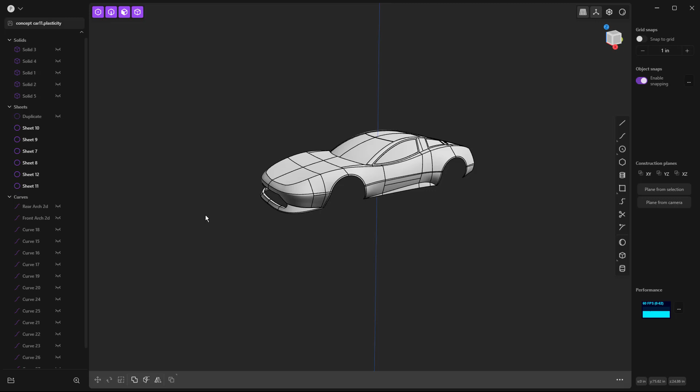As I've mentioned in all the videos, we're going through this process in real time, so anything we run into along the way is something you'll likely run into too. We're troubleshooting, problem solving, and now we're at the point where we want to finish off the back end and decide how much detail to put into this thing.

As I mentioned, these scoops that we did, I'm not really loving those shapes. Probably need to spend a little more time there, but I think the back end really needs to be finished first.

So we're going to get started by getting rid of the mirrored versions, and we're going to work from the midline. Now the car currently has a completely flat back end, and that's something we have to change. It's going to slightly affect the little spoiler we created, which is fine because it's just a general shape.

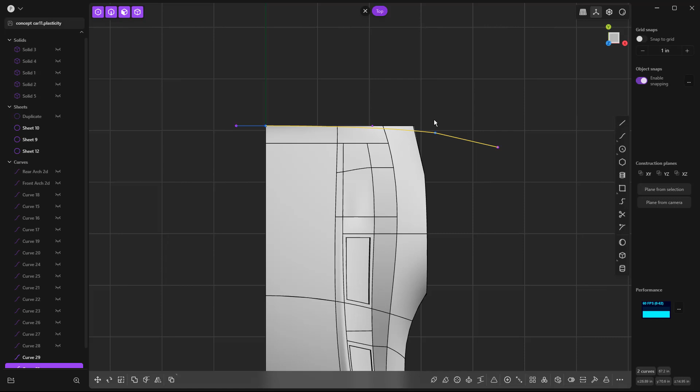So what I want to do is start by adding a reference line here, and another reference line out here, then bridge a curve between them. A lot of times I'll use these sacrificial lines, G0 at the end, G1 at the start, and then I can use that to cut the body with C. So then I can get rid of this little piece and the curves I don't need.

So we gave it a little bit of curvature in that direction. And from the side, it's straight up and down, and I really want it to maybe roll under a bit more. We've got this section here, so what I'm going to do is just start with a vertical line and bring it back to about where I want, then rebuild.

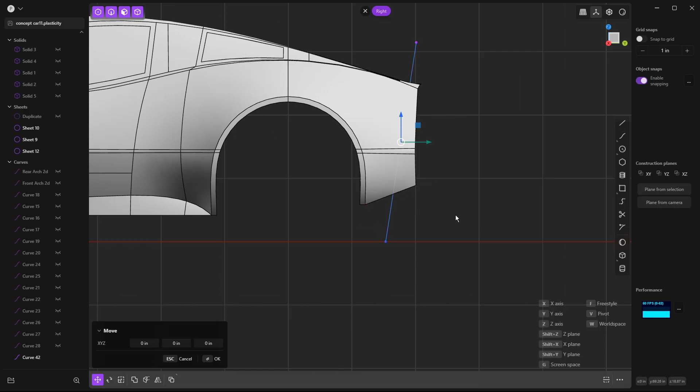This side view isn't as critical as, say, viewing it from the top across the mirror line, but I do want to make sure I'm still kind of close to the spoiler. So maybe go there. If you have trouble seeing it, you can always turn off show faces, and let's play around with this a little bit.

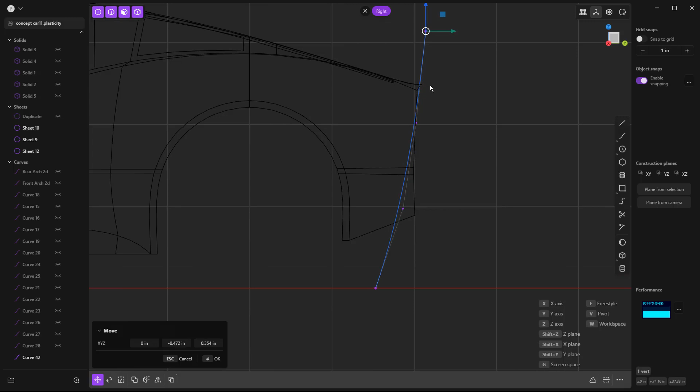We do have to be careful here because of the curvature we just added, so just keep in mind we have some limitations. I'm just going to see what this looks like, bring this over, bring back our faces, and use this to cut the body and see what it looks like.

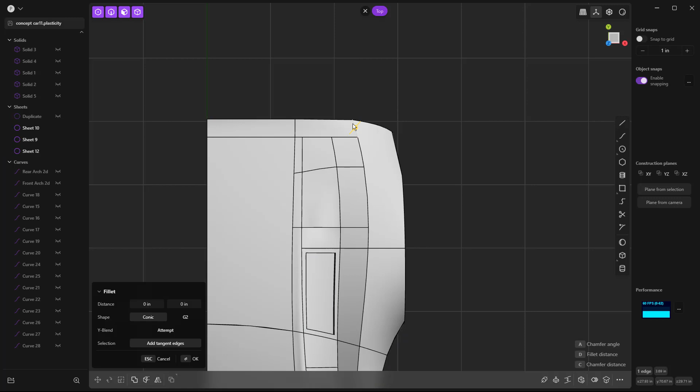All right, so pretty short back end from the top. It kind of makes a little bit of a jump at this edge, but remember, we don't have tangency here—we've still got a sharp edge. So I am okay with that, not too worried about that jump in transition. I think we're good to go on that.

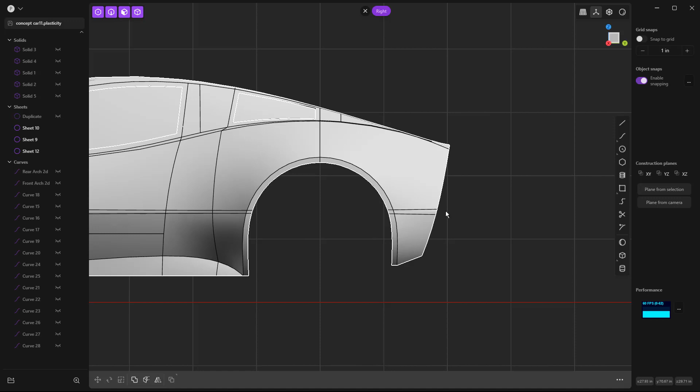Another thing to consider is that on the front end, we carry that mid-body line into the front bumper. Now on the back end it's pretty low. I'm not necessarily sure we want to carry it over, but generally when you have a hard body line like that, whether it goes up or stays there, it's still used as an inflection point for other curvature or changes in shape. So we'll just have to play around with it and see what it looks like.

The first thing I'm going to do is actually fill in the entire back end, and then we're going to cut away sections of it that we might not want—maybe we'll add things like an air splitter or an air dam or something like that.

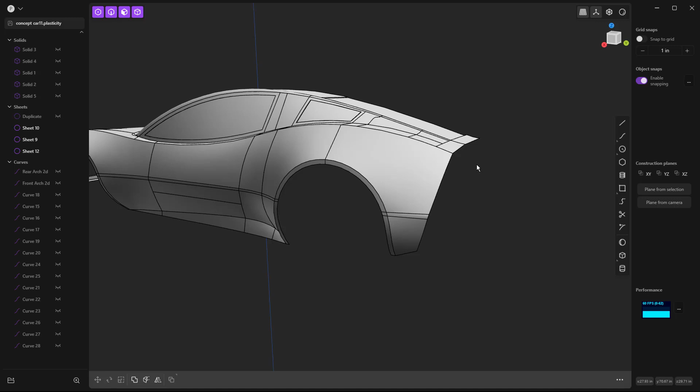So let's just get started by going to a side view, taking a look, and probably just adding a curve here. From a side view, I'm going to bring it in roughly the same direction, rebuild it, and kind of bulge it out. We do want to make sure the bottom is at the right location, so I need to move that up.

And then maybe move that one up as well. And this one.

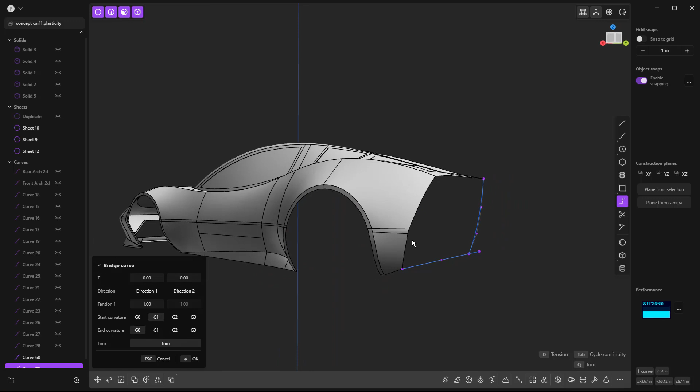Now from there, I'm going to add a line in the Y direction and then use this as a bridge curve. At the midline, we always want to make sure we're maintaining tangency. At the rest of the body, G0 is going to be fine unless we want to carry tangency out for a lower section that's maybe a bit wider, more like a true bumper. But for a concept car like this, it doesn't really fit.

So we're just going to go with just a basic tangent line. We're going to extrude this as a tangency reference and then try to fill this in. I am going to try my hand at loft, which probably isn't going to work, but I'm going to loft from that first curve to these curves, G0 here, and then we're going to shift, select guides, those will be G0, shift select this one, and then just take a look.

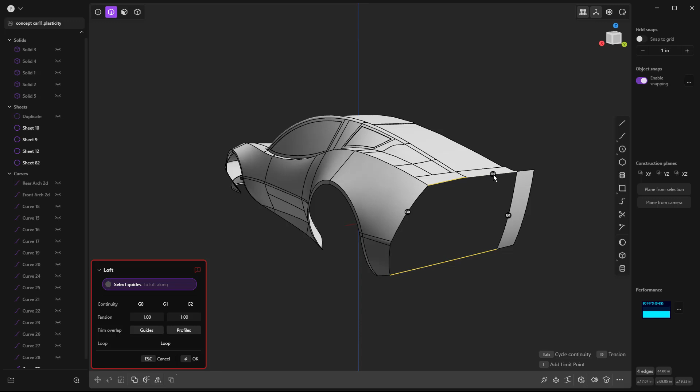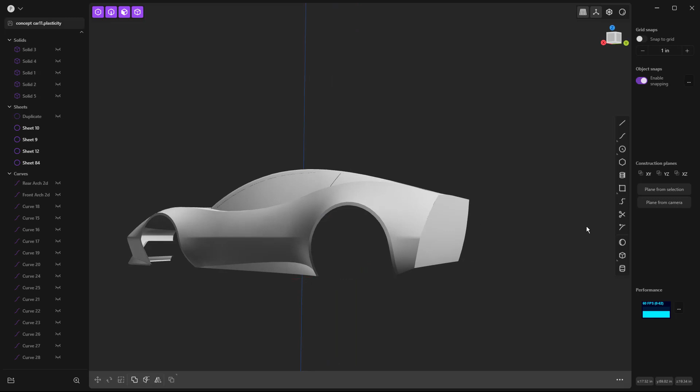Let's get rid of those for now, and let's take a basic look. So if I hide the edges, we've got that hard transition on the back. Now that's a lot of body. Definitely not what we want, but again, it's just a starting point. So with that, I think that looks pretty good.

The next thing that we want to do is figure out where we actually want to break it up. So using Alt and the mouse wheel, I'm going to get to sort of this back view. I am going to duplicate these curves, and I'm actually going to hide the rest of the body. I don't really need to see it, and I don't want to cut it.

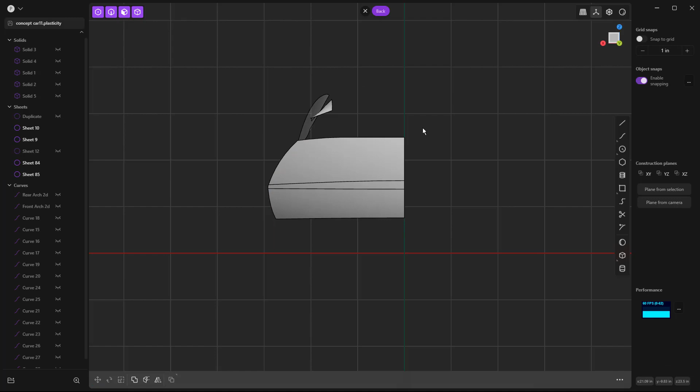And I think I actually duplicated the entire body and not the curve. So I'm going to go to my curve selection, hold down Alt, grab the outside, and Shift D. So that should give us the curves on the outside. Then I'm going to use O to offset those, and it's not liking that.

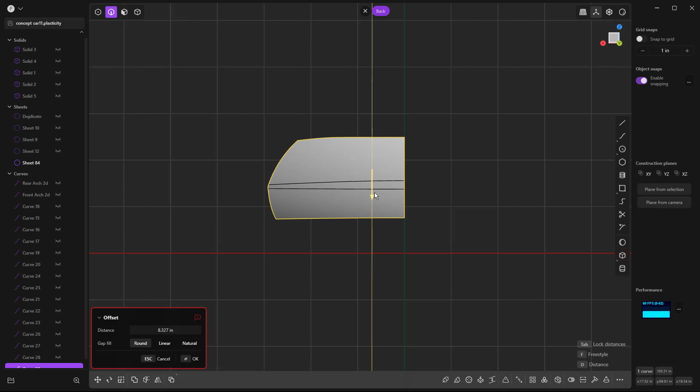That's okay. We'll go back to our All selection. We'll select the face and do offset on the face. That looks okay. We'll do the same thing down here.

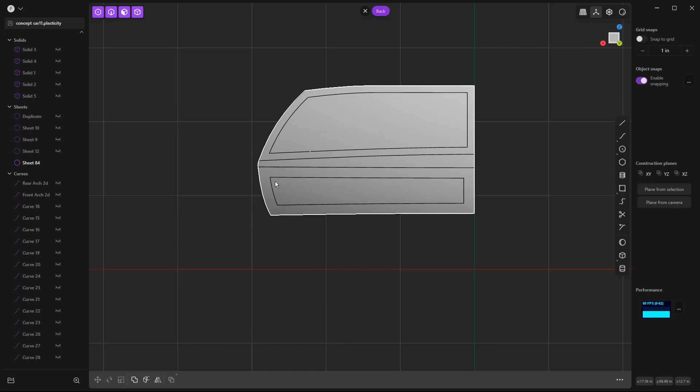And basically what I want to do is I want to cut away probably everything up until that midline, but maybe keep it horizontal. It's hard to tell.

So what we're going to do is we're going to do a bridge curve from here to here. Those will both be 0. You can see that this one here is not actually attached to anything, so we'll need to try again. Need to make sure that we are attaching it to the right spot. We'll set that at 1.

We'll just do G1 continuity for both of those, and I'll do Shift I for imprint, which should give us a division there. And we'll do this, actually over here we don't want to do that. What we want to do is carry this out to the right.

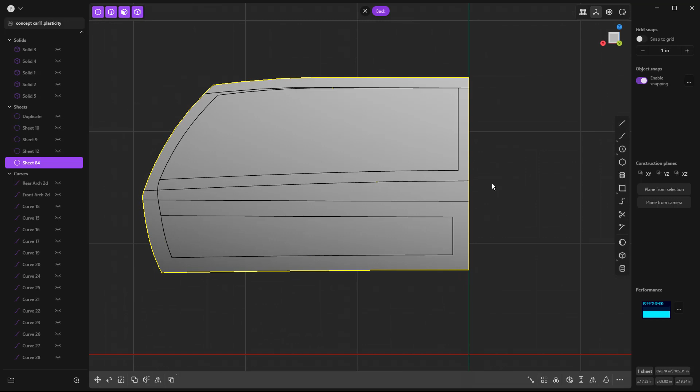So I'm going to use Control R, snap there, and let's do it here as well. Control R, snap there.

So what I'm thinking is we're going to keep this, we're going to keep this section, and we're going to keep maybe this section. That should be divided. Let's do Control R down here as well. Hit Tab.

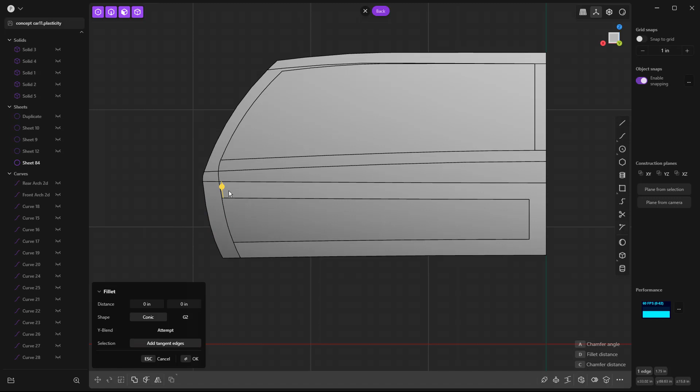All right, now let's divide it up. Let's go ahead and cut that. So I'm going to take some of these faces and let's delete them. Let's do Shift Delete. And let's bring back the rest of the body just so we can see it.

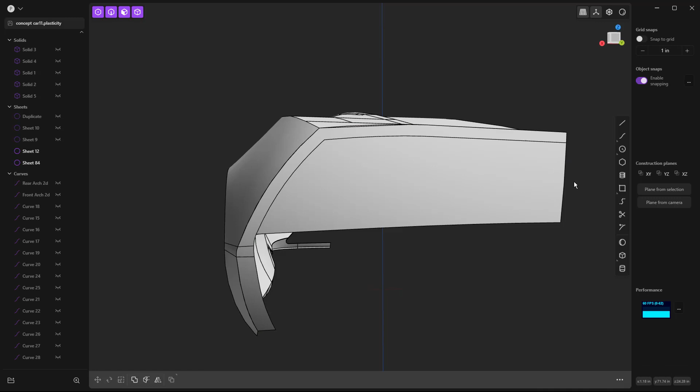There's a couple extra lines that we don't need. So like this one, we can hit delete. It's an extension of that there. We don't need that. We can get rid of that. But essentially, we've got just a small piece down here and the more major piece up here. So I think that's looking good so far.

We'll hide that body. Again, we'll go to sort of a back view. And next what I want to do is I want to duplicate this edge, so Shift D. I'm going to move it over here.

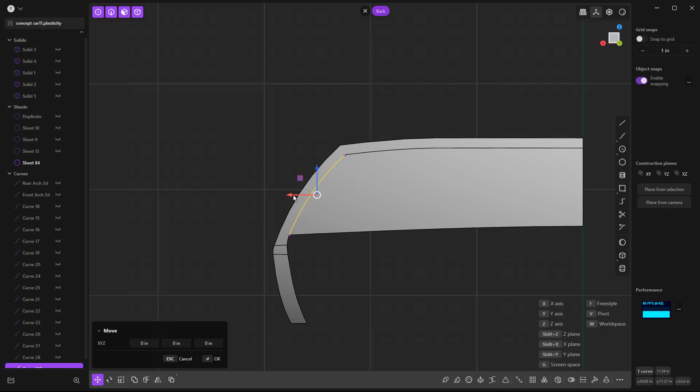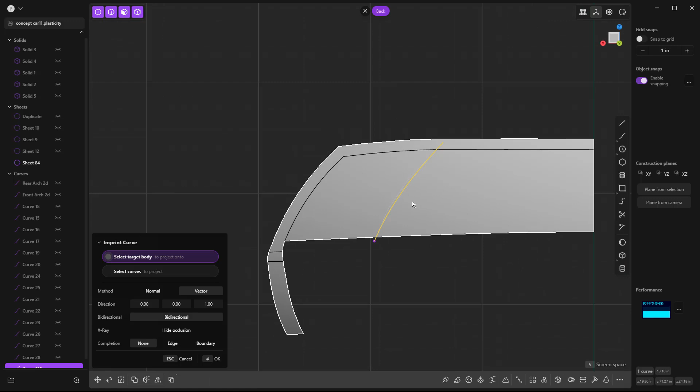And then we'll go to our All selection. I'm going to rebuild that curve, and take its end and kind of move it up. So what I'm trying to do is mimic this edge here. And then I want to use this to imprint, so Shift I, imprint that.

And a little extension up there we don't need, I can delete that. So a lot of times what you're going to end up with is these sort of overlining or competing trimmed edges. So what we want to do in this section is sink in or sink back a section.

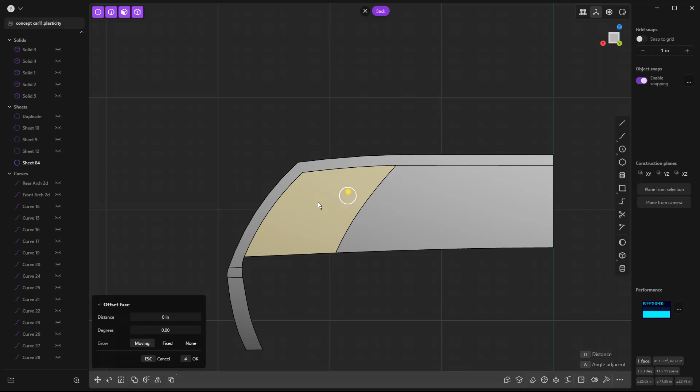So I'm going to hit O for offset. I'm going to offset that in a little bit and then delete it. Now, actually, let's bring that back. We're going to do Alt and J, which will unjoin it, and then move it forward. G, Y, push it back a bit.

So part of the reason I want to do this is because I want to fill this area in, but I want to fill it in with a smaller part. So I'm going to use Control R and trim away some of it.

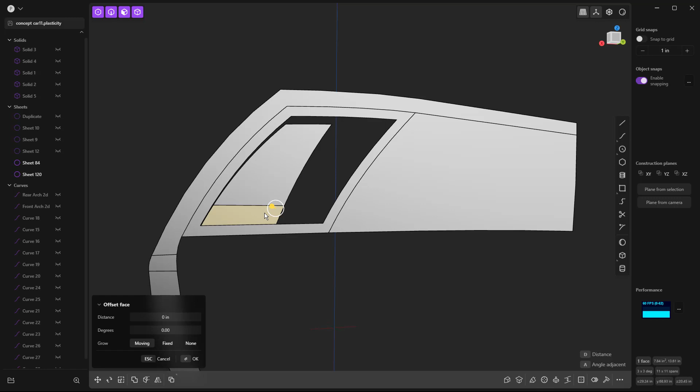And we'll do Control R again, maybe trim away that section down there. And now what we can do is use loft, and we're going to use our edges. We're going to loft from here to here, doing G1 or G0 continuity.

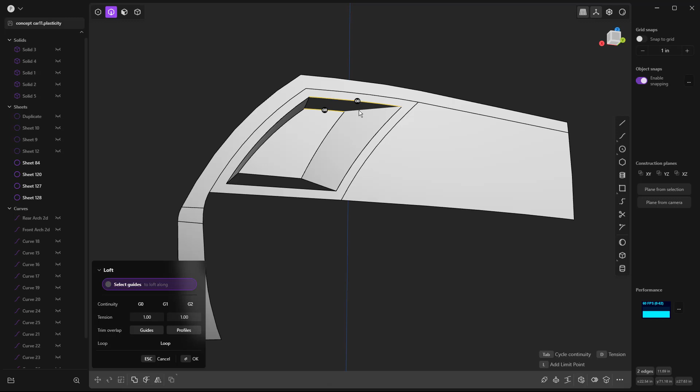Keep everything sharp for right now. We'll loft from here to here, again G0. And then we'll do the same thing here, so loft, G0, G0. But we'll use this as a guide, and this is a guide. Make sure both are G0.

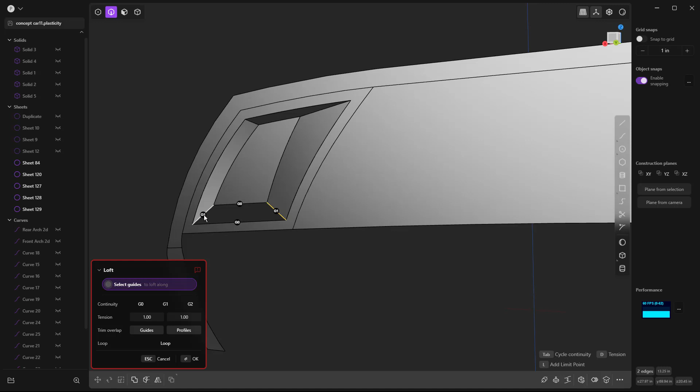Kind of hard to see, but there is a surface in there. And we could also use patch - that would be fine, but patch is a little bit tricky when things aren't joined together. So I just kind of prefer loft since they're nice and four-sided. Select both guides, make it G0. Make this one G0 - doesn't want me to click on it for some reason. Just do G0 for all of them.

All right, so with all selection, I'm going to go ahead and join all of these pieces together. And it gives us a little bit of detail - that could be a vent, could be a tail light, but it gives us a little something to go on.

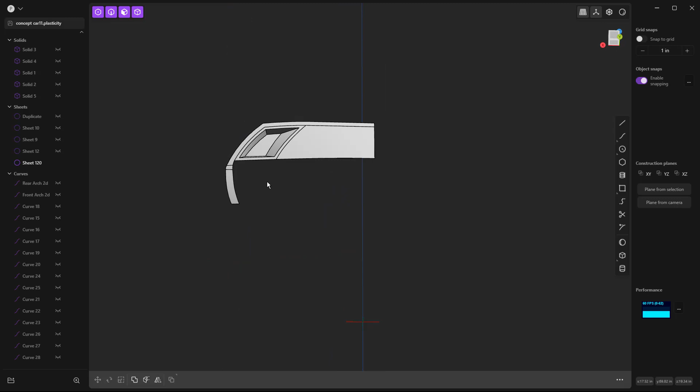And I actually want to follow that line into the middle, so I'm going to do Control R and maybe add a little bit more detail here. So Alt and J, and then just move that back a little bit.

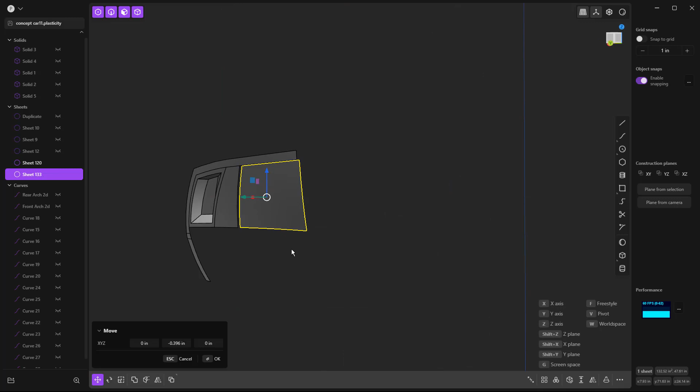And I'm just looking to break things up visually. Just having a large panel on the back doesn't look very good. So what I want to do is just kind of break these things up. We're going to loft here, G0 for both, and then we'll repeat that over here.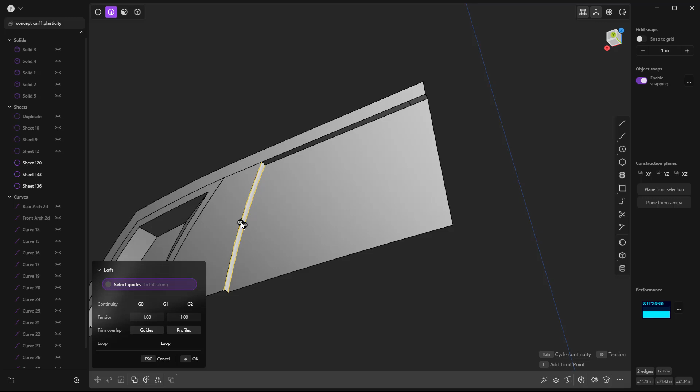So loft, G0. Again, because the other edges were straight, we don't really need that as a guide - everything should still line up. I can join these together. Again, one of the benefits of patch is that patch will actually join all these pieces together, whereas with loft we need to do it manually.

All right, so that should all be one sheet. And we can come back and do things like select this corner and round it off with a fillet if we want to. And we can do the same thing with these as well.

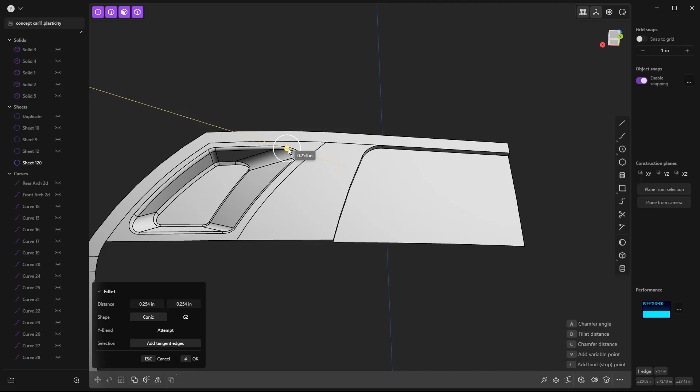So if we want to add a fillet there, maybe add one to all the corners, and then one at the base, and then one at the top. Keep it fairly small, and we'll do the same thing here.

This one might be a bit tricky - let's see if it does it. Yeah, it does it, okay.

All right, let's bring the main body back and just take a look. So you can see we're adding some detail - it's looking pretty good.

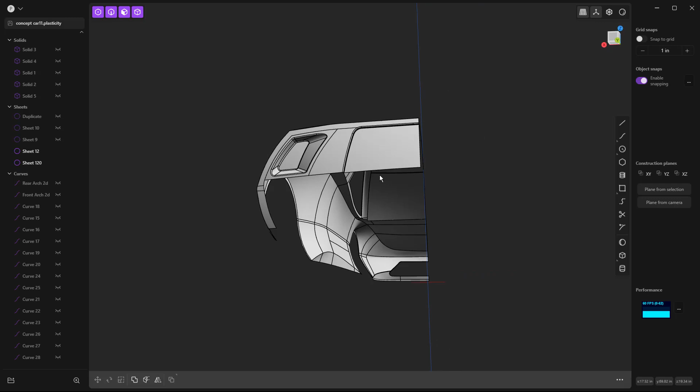And we could certainly do some more underneath here for a splitter. Again, I want to be careful of the time because adding all these details just takes a bunch of time.

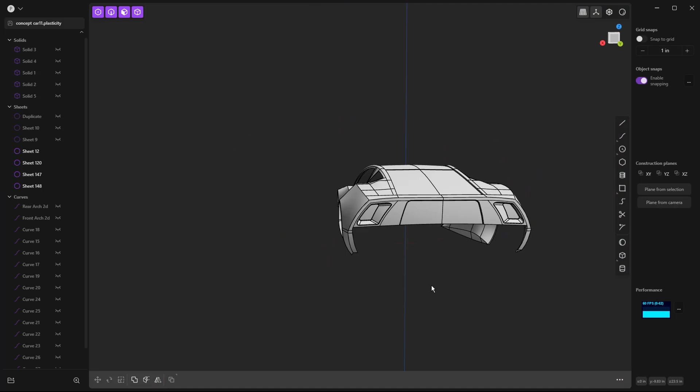If we mirror this to the other side, just take a look - let's go X. So I think that looks pretty good.

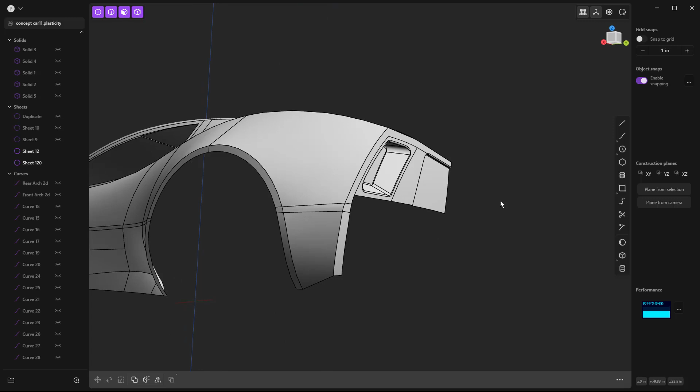All right, I'm going to undo the mirror and just spend a little bit more time on maybe adding some detail here. I think what we could do is maybe start from here.

Actually, that's not working, let's delete that. All right, what I want to do is start from that corner point and come back in the Y direction, and then view it from the side. So what I'm looking to do here is maybe have a little bit of a bumped out section to represent somewhat of a crash bumper.

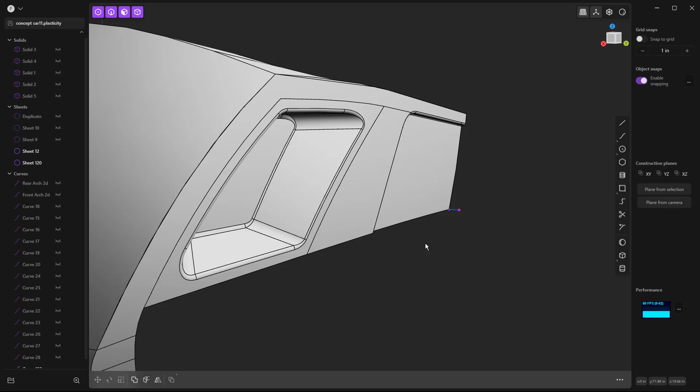And then we'll do a line and maybe come down and maybe somewhere about there. Rebuild it, give it a little bit of shape. And then I'll extrude it.

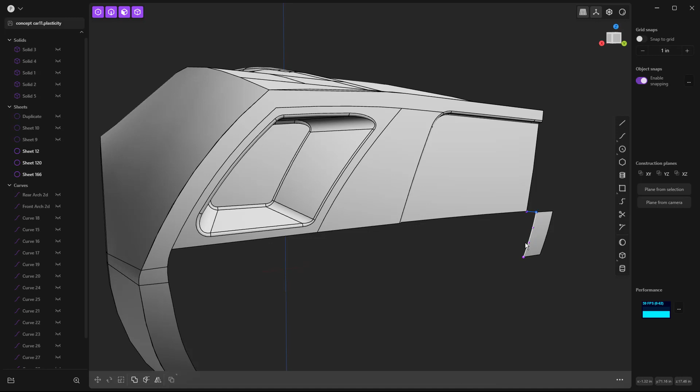Again, extruding it for the midline tangency reference, but also if we make a bridge curve, that kind of helps there. And let's just do a quick check.

Let's do a bridge curve to there. We'll set that one at 0. Set that one at 0. I'll do tangent on both of them.

And I am going to try to patch this and just see what happens. It's going to be a little bit messy because now we've got this little fillet in here, this tiny section. It's probably not going to work. Probably what's going to end up happening is I need to do a loft. But let's just try. Let's see if it can attempt it.

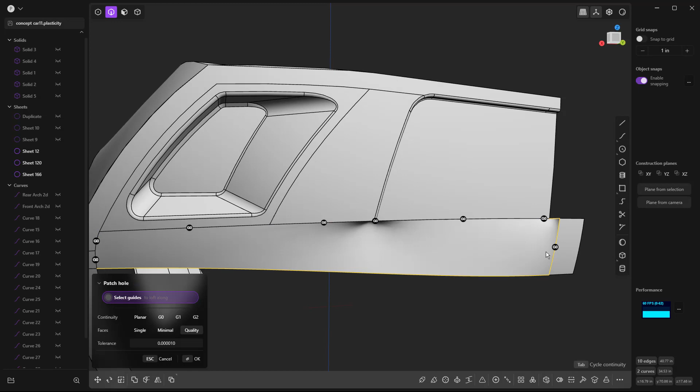So tangency here, and you can see what happens. It's trying real hard to sort of get the curvature to work out right. So really what that means is that we need to build this in small pieces, which I think is going to be kind of tricky.

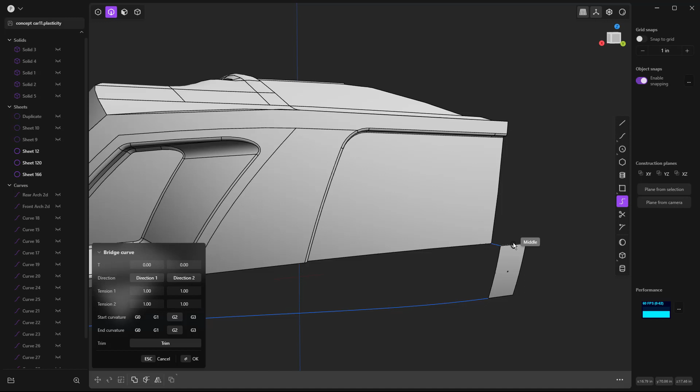But I want to try something real quick, and then we'll kind of move on from this and just leave this bottom piece open. So I'm going to do a bridge curve there. We'll do 0, 0, G1 tangency, and then we will loft from here to here.

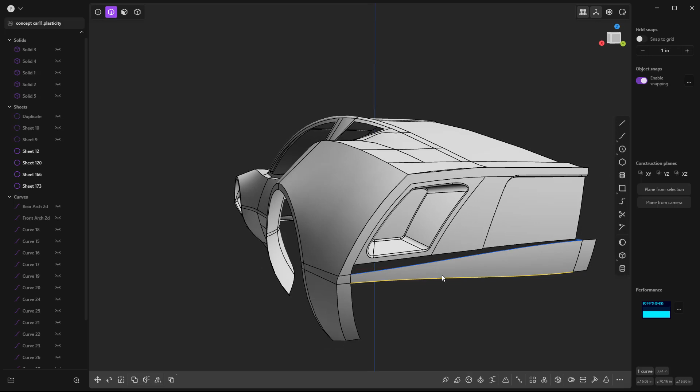Tangent on both ends. Shift select a guide curve, and then we can delete those.

Yeah, it's not looking super great, but again, whenever we add these minor details like fillets, then trying to bridge that curvature can take quite a while.

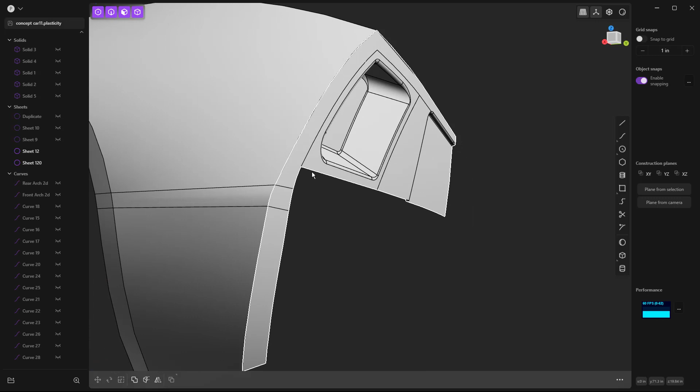I think what would need to happen is we would need to take this edge here and duplicate it and maybe pull it out in Y and start to build a surface off of that.

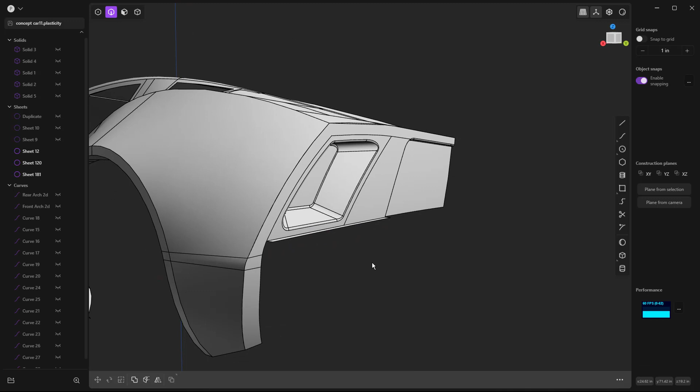So if we loft between these two, G0 continuity, then we're starting to build that sort of shelf section outward. And then, just kind of keep building it. So I'm not going to do it in this video because there's other things that we can spend our time on, but that's the general process there.

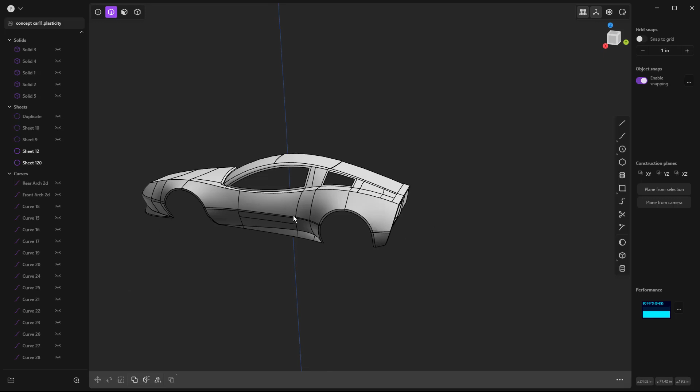Okay, so at this point, we could add more detail to the hood if we want to. We could add a spoiler. We could really come back and go crazy with a bunch of detail. There's one thing that I absolutely want to fix, and that was this sort of monstrosity of a scoop I put in here. So I want to make sure that I fill in this area.

I'm going to do it with holding down Alt and then just try patching it. We want to carry tangency off the back and tangency off the front and try to carry tangency off of up here, but this is still a sharp corner and that's going to join it together.

We also want to join these two together, so I'm going to go ahead and hit J, make it one piece. And if we want to, at this point, we could select this edge and we could add a fillet.

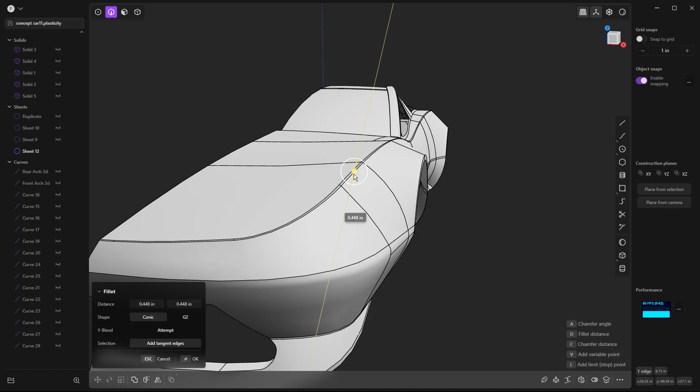So just adding a small fillet to kind of clean that corner up. If you want to spend some time adding a bulge or a scoop in the hood, you certainly can. I think looking at this thing from the front, it could potentially use some more openings here.

So I think what I want to do is tap Shift there and there, which is going to give me sort of this tangency reference. And then I'm going to just take that curve and move it.

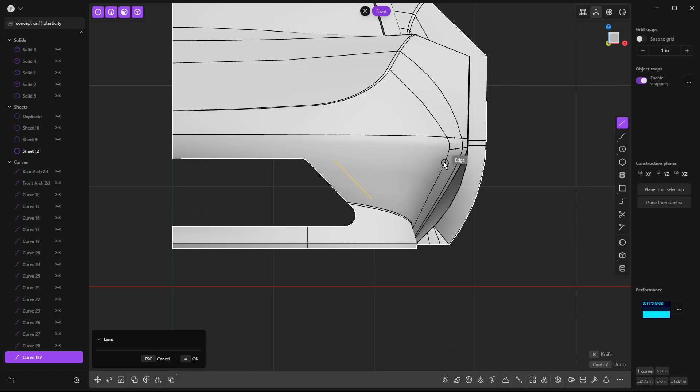And then I want to build from it. So Shift A. I don't want to go off of that face, so I'm going to tap Shift here, which kind of gives me that coincident reference.

And then I'm going to move that one up and then hide the body. So essentially what I'm trying to do is just make another opening and see what this looks like in the body.

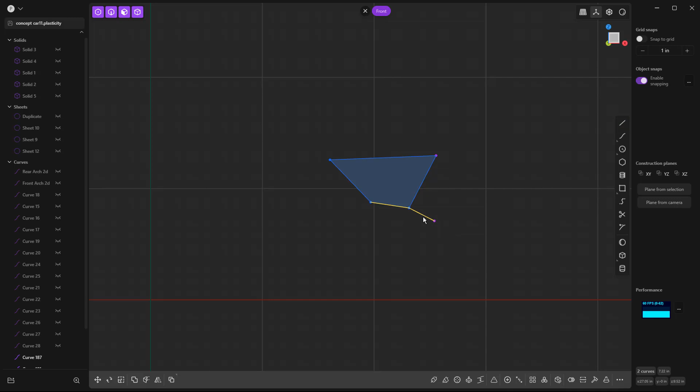And we're going to Alt J to unjoin that. We'll join all these together.

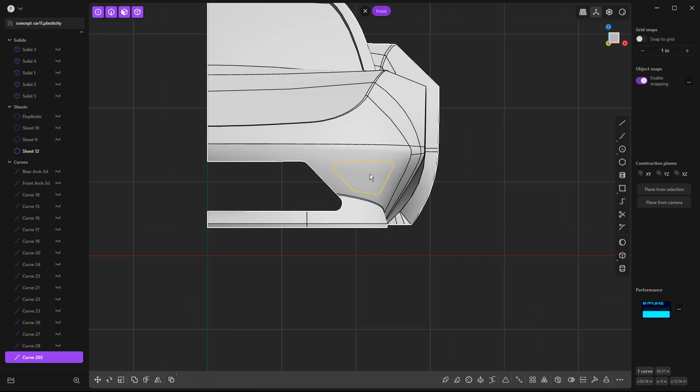And actually those corner points are purple, which means that they're not connected. But if I select this curve and hit B, it should let me fillet all the corners together. So that looks okay. I'm going to bring the body back, view it from the front, and then do Shift I to imprint.

Now, one of the problems with this is it's going to imprint the back as well, or potentially any other portion of the body that it's going to hit.

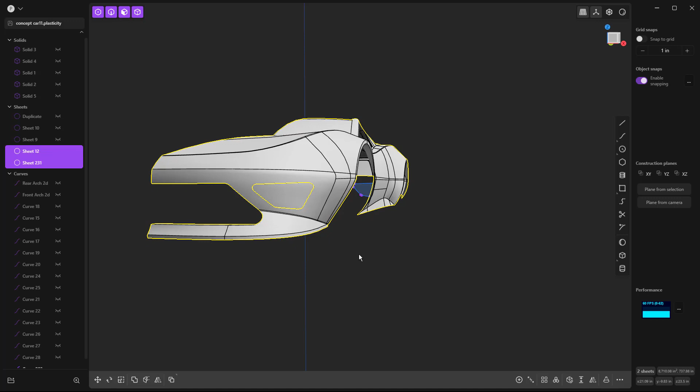It doesn't really affect us in this case because it doesn't hit anything else, but just keep that in mind. So what I'm going to do is Alt J on this and then move this one back in. So G, Y, and just sort of pull it back. I don't need the curve anymore, I can get rid of that.

But it just adds a little bit of extra shape to the body. And we can connect it back together. Let's connect it back together with a loft.

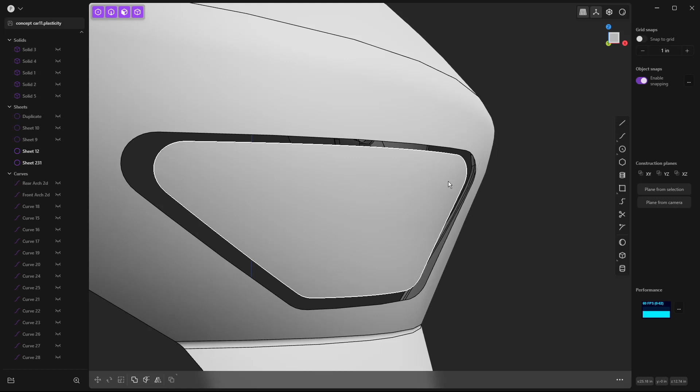Now, if you want to, you can take this face, offset, and sort of offset it inward a bit. Let's go back, I'm going to bring it in just a little bit. And then I can select the outer portion.

Now remember, when you're zooming in, if it kind of goes crazy like that, you can always go to an orthographic mode, which will be a bit easier. So I'm going to hold down Alt on my edge selection and then Shift and Alt here and try to loft between the two. We're going to try G0 continuity for both.

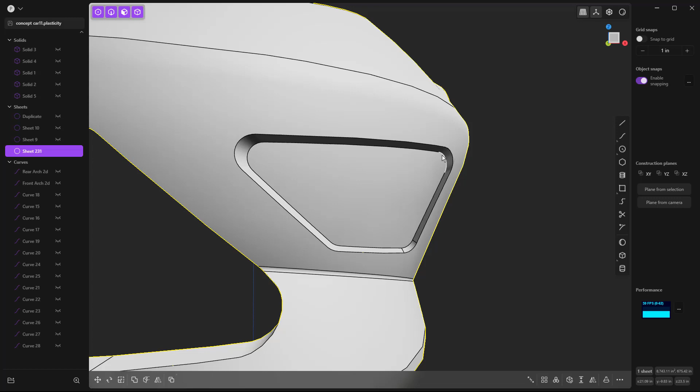And then join them all together. So J. Then I can take this and add a small fillet if I want to, if it'll allow it.

It's thinking pretty hard. Let's go a little bit bigger and hopefully it doesn't crash on us. No, I'm not going to risk it. I'm going to hit escape there.

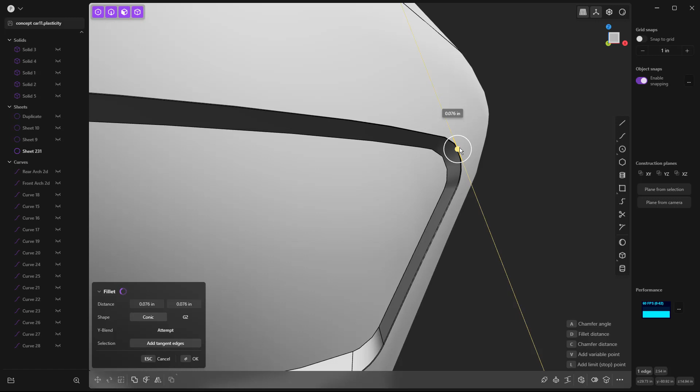This one should work a bit better. But again, it's thinking real hard, so I'm not going to risk that crashing.

All right, so that's a little bit of extra detail. If we want to add any other sorts of things like scoops, so from the side, if I want to add some sort of scoop here, we can do it with this sort of the same method.

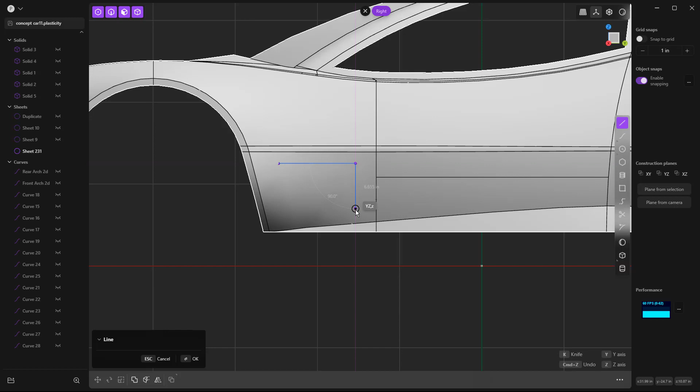I'm going to add a horizontal line here. I'm going to kind of follow the shape. And then I'm going to do Shift and I and imprint.

And one of the reasons I want to do that is because now I can take this and do Alt J. I can move it inward. So GX, kind of pull it in where I want.

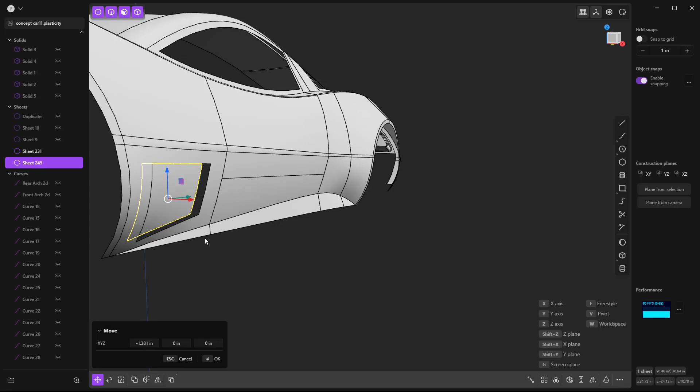And what I'm looking to do is to make an opening at the front and have it blend back to the fender at the rear. And we're going to do that with bridge curve.

So we're going to bridge from this upper edge to this edge here. Upper edge will be at 1, lower edge will be at 0. We're going to do G0 continuity at the end and G1 at the start. And we'll repeat that, do it at the bottom.

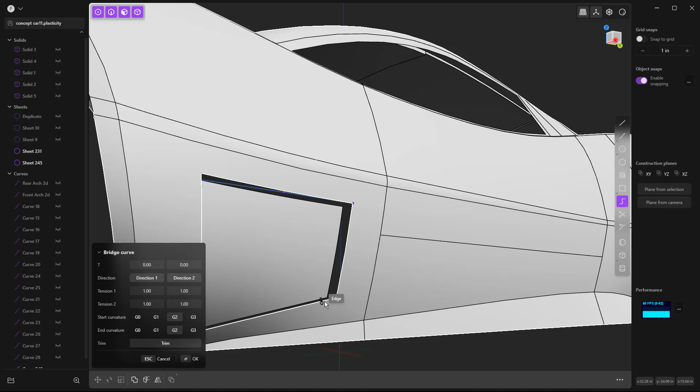Let's go ahead and just move this out of the way a little bit. So we'll go from that edge to this one. Go 1.00 on that one, go 0 on this one, G0 on the end, G1 at the start.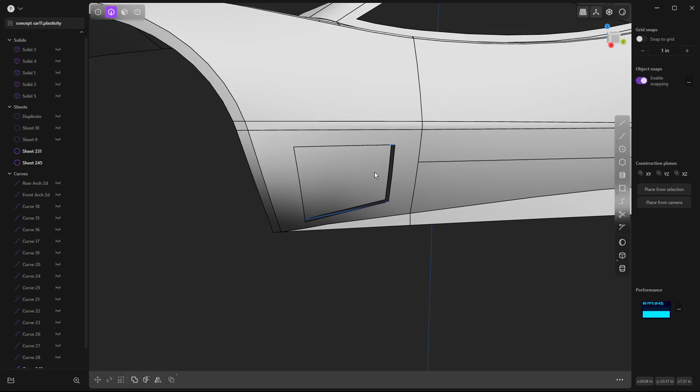And what this allows us to do is create a loft going from that edge to this one here. So hold down Shift, loft between them. We're going to do G0 at that end and then select our guide curves.

So hold down Shift, select both guide curves, and then we can delete those curves and delete that offset surface. So it's an easy way for us to sort of begin building these things.

I'm going to join these together. I'm going to use my edge selection to loft between these with G0 continuity. You can click G0 here and it should set it for both curves. If it doesn't work, then start by going to the front, set both to G0.

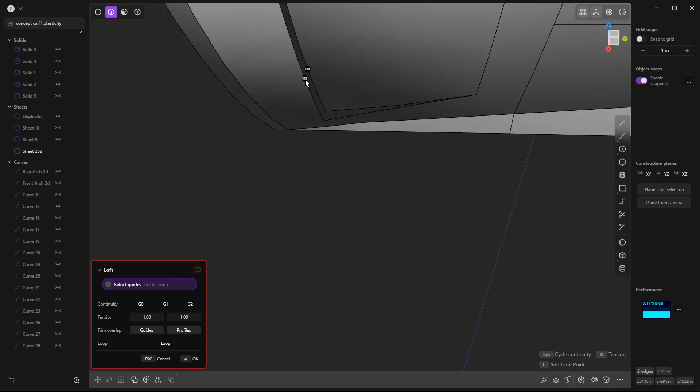Join that to the rest of the body. And then we can use the edge selection and Alt to get that and do a patch. Patch will default to G0, so it's a little bit easier. We'll do the same thing under here.

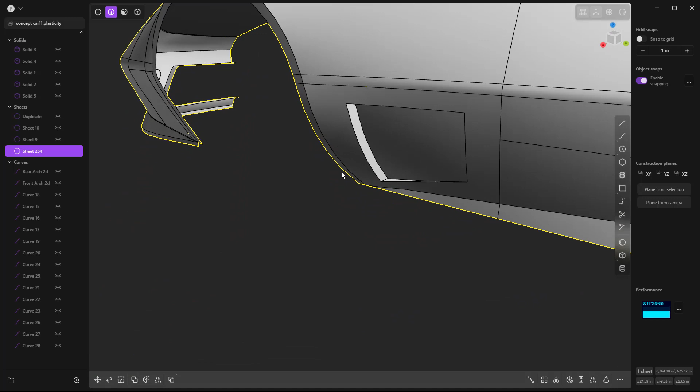Hold down Alt to select that opening, F, patch, and accept it. And remember, patch automatically joins it back together. And then I'm going to add a small fillet here and a small fillet here. Just pull those out.

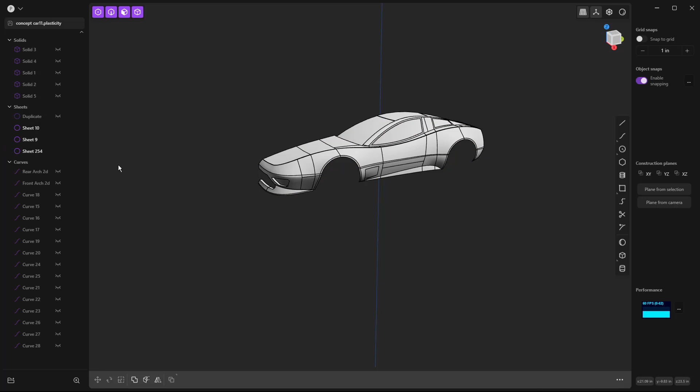Again, it's just a little bit more detail. I'm going to leave that sharp, but just kind of adding more detail. And you can do the same thing in the rear fender as well. But at this point, we're 25 minutes in.

I don't want to sit here and spend all the time building this out, but I do want to connect the windows. Using my edge selection, this is going to be kind of hard to see, so maybe if I hide the faces it'll be easier. We're going to go between these two edges. Actually, I'm going to go into perspective mode so I can zoom in a bit more.

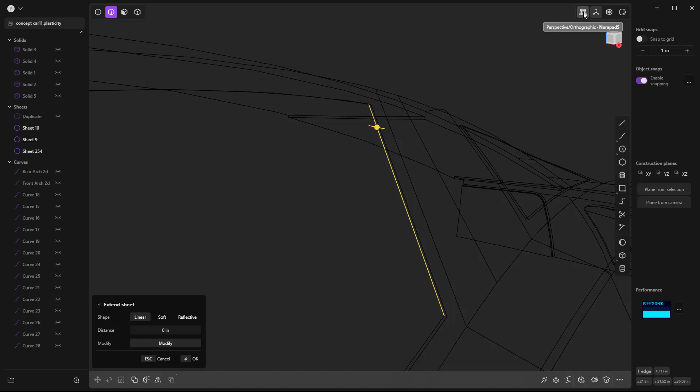Shift select that, and I want to loft between them with G0 continuity. That should build a new face if I bring back my faces. So we have that new face.

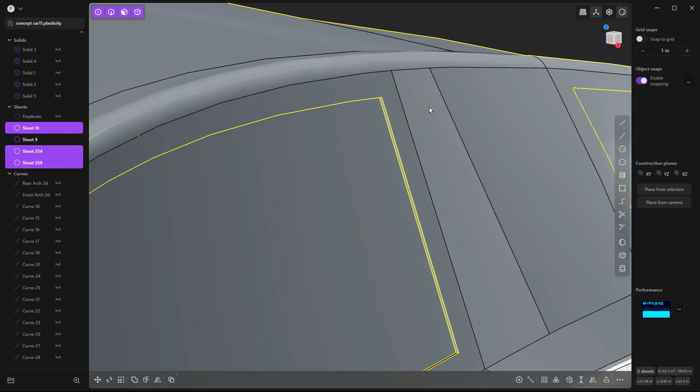I'm going to go back to my all selection, hold down shift, select the window and the body and join them together. Part of the reason for that is now we can hold down Alt and select the rest of that open boundary and try to patch it with G0 continuity.

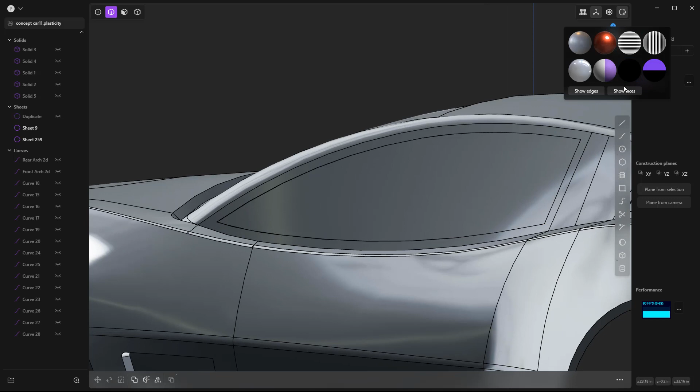Now, if it doesn't work, generally what we have to do is repeat that same process. So I'm going to go back to hiding the faces and try lofting from one curve to the other if I can find it.

It doesn't let you select through the body unless you toggle on X-ray mode, but we want to make sure we have those selected. We'll loft G0 on both and see if it worked.

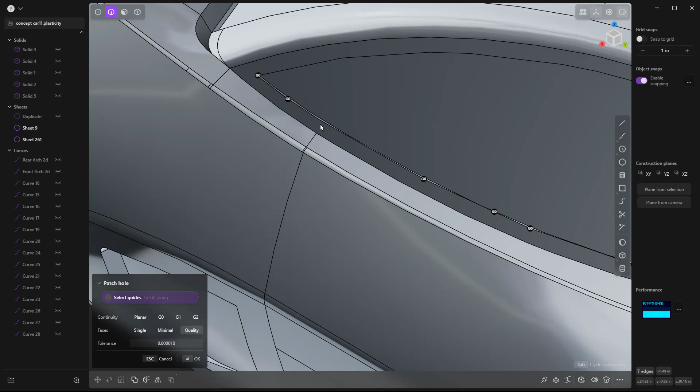Now, if that worked, we want to join these together. Once again, I'm going to hold down Alt, try to select this open boundary, and try to patch it. So that looks like it's patching. It's going to automatically join it. I think there's likely another opening somewhere, but I think that's okay.

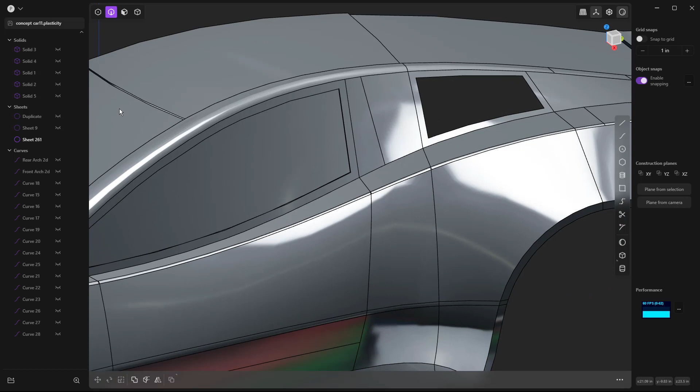So a little bit of a convoluted process, but that's the way you would go about it. So this one here, I have to do the same thing. I'm going to try the patch method or the loft method first between the curves.

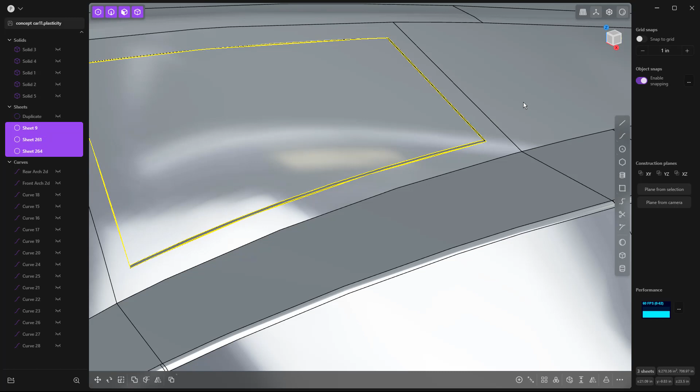Hold down Alt there and Alt there, so Shift Alt, and just see if we can loft between them with G0. Right click to accept, go back to all selection and join everything together. Okay, so it looks like it worked. Let's go back to perspective, hide our edges, and mirror this thing to the other side.

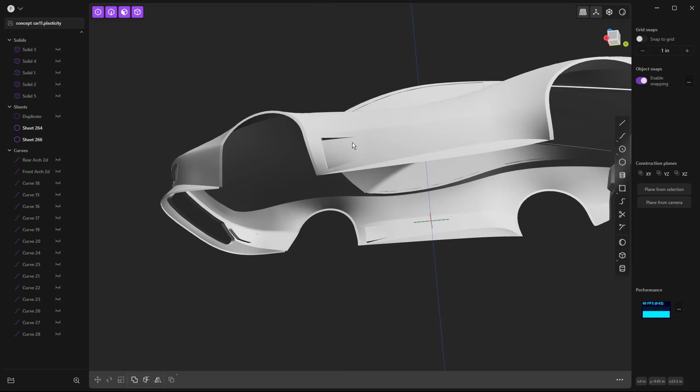All right, let's go to the clay model where we can see some of the other details we added. So the vent coming off the front fender, we've got an extra little fog light vent area. We didn't do anything with headlights, but it should be pretty apparent from the last 5 or 6 videos that we're just reusing the same tools over and over again.

We're building out a rough structure with straight lines, rebuilding them, using blend curve, and building the surfaces out bit by bit. At this point, I think that's probably as far as I really want to take this. We could do more, you could spend more time adding details and features, but there aren't really any new tools to cover.

We use Control R to break faces up, Shift I for imprinting, C for cutting, T for trimming, Alt J to unjoin. Basically we're just using patches and lofts to build a majority of everything out. The care really needs to be taken in the curves and the curve network you build, and just play around with getting some shapes done.

Now, again, at this point, I don't plan on going any further with this. If people go through this entire series and want to see more or have questions, I'm happy to do some follow-ups and add more detail as needed. But without introducing any new tools, I don't think it's a good use of time.

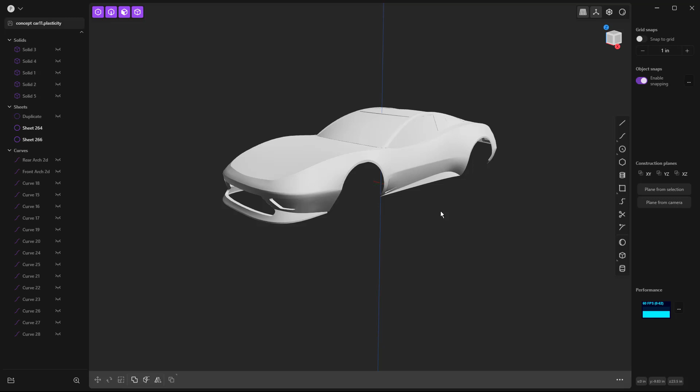I know that these videos are long-winded, but that's kind of the nature of the process. You want to see how to model a car, this is the process you get. But please let me know in the comments if you enjoyed this, if you had problems with it, or if you have any questions. As always, thanks for watching, and we'll see you in the next one.